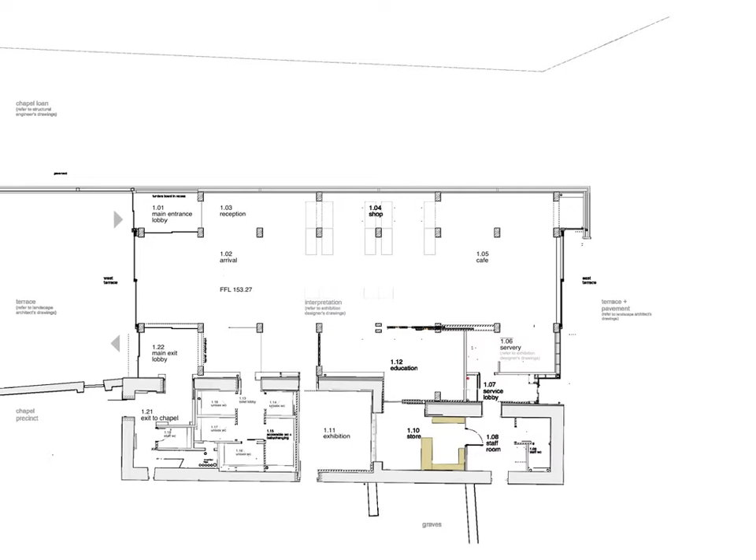So we've got all that stuff now. In order to get back to the same position as if you'd gone through the gate itself, it seemed to us that we had to expand this dimension into the place that you pass through. So that gate therefore became that truss system that receded into the distance, that became the route in, through, and through here. And architecturally, John's here, Simpson Brown, a lovely restoration of this little building here.

The way it's stepped down the hill, using that truss system of the gate, forms a series of stepping planes to reduce the sense of scale. So that becomes part of it, this thing hiding behind this object.

I've got to reiterate, this was not driven by us wanting to do architecture. We were put in a position to have to somehow perform in that position or walk away.

And that's the question you face in terms of that process, looking back through that idea that somehow it wasn't a building, it was simply a covered street. A lich gate that actually led you in off that street. It was a kind of non-attempted, non-building.

Jump to another project, Fettes. That incredible Bryce kind of elaboration of nature as it explodes from the ground.

And then jump to 50 years later, Kinnaman's amazing dining hall, which, when you study it, you realise is set within the trees of the garden. Whereas Bryce creates decoration throughout his building and in the admiration of detail, Kinnaman takes the idea of nature and creates these trees that rise up, and the canopy of the building drapes down as this series of branches around that setting. So you stand within nature.

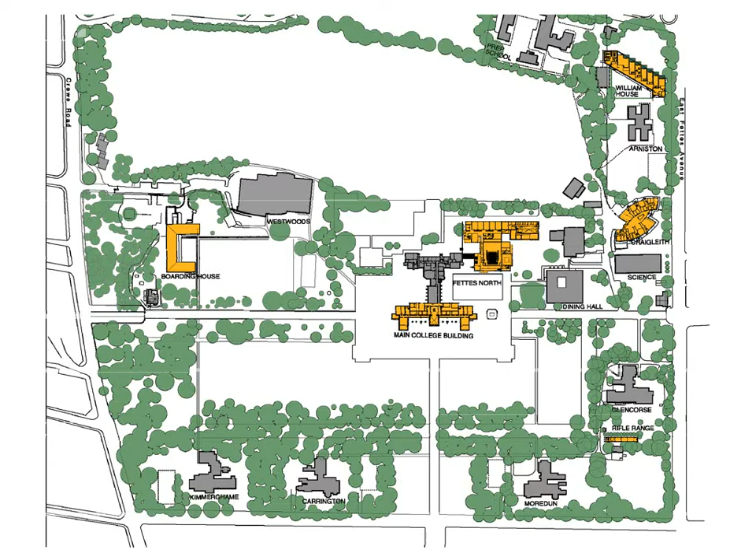So there was a kind of strategy of the new and the old, and we were talking about stone, girls and boys. But its framing and its angle is all about an orientation to the main tower itself.

So not only is it about the curve of the long-term master plan, but the relationship to that orientating tower. And this lovely bridge - the idea was the staff, if they needed an emergency to get up to the girls' side and boys' side, it was a shortcut.

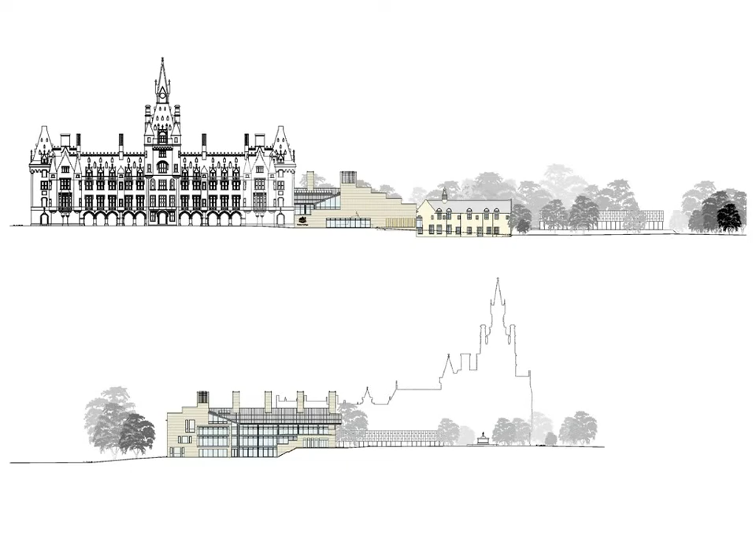And that's a great thing, architecture made out of need, which was what happened. So the building is about the original Fettes building and then the simplicity of that wonderful dining hall - again, both old now - and the insertion then of the new concert hall and academic building, which will be built over the next piece.

But the alignment, the orientation of the giant crow step that forms the step that ultimately sets the kind of line for the dining hall, and then the orientation of the central axis on the war memorial in terms of the ventilation shafts, are about those ideas.

And what that's made me think - those two projects made me reflect that somehow this relationship isn't right. That actually, architecture needs to come out and its use or user needs to come in relationship with heritage. So I was saying, in fact, it's use and heritage that drives things. It's use, it's people. Take the people away from Edinburgh and you have archaeology, you have Pompeii, but it's the use that drives, and the use that we work with.

The portrait gallery, a wonderful piece.

The number of people who stood in front of those steps - we spent two years talking about those steps, and the number of people who wanted to keep that demarcation from the pavement. It's okay that disabled could come in the ramp down the side here. That's okay. But is it okay?

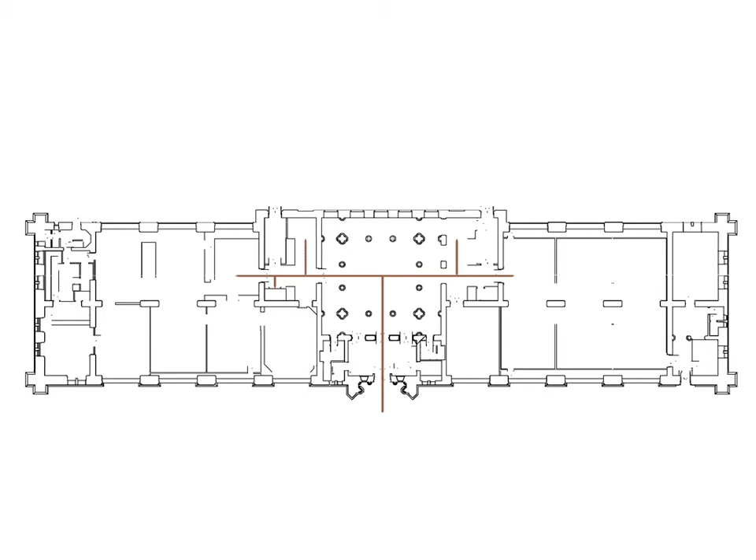So my colleague came up with this thing we did - this is the result of it. We actually, this is a secret, conceived this National Portrait Gallery with a big face, the mouth, and a wonderful tongue sticking out, for the folk who didn't want to step on it. Because that is about universal access, which is really important.

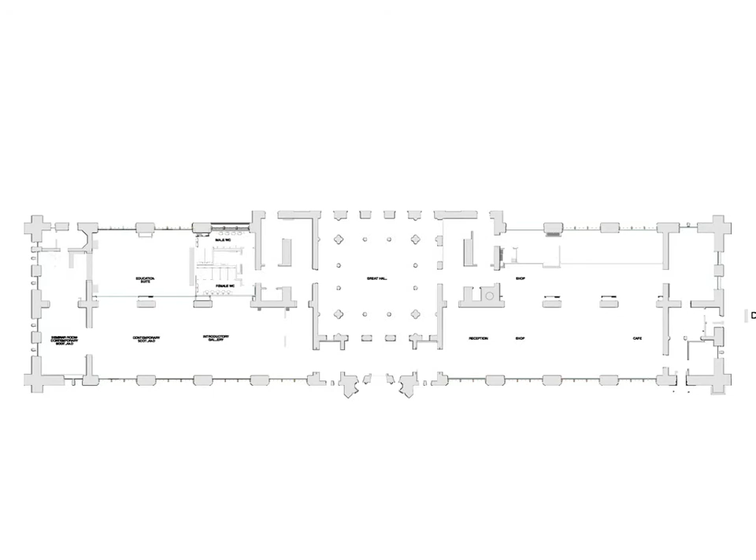But having established that - there was a little toilet here and a security office here. By simply opening up those two walls, suddenly the loggia of the building, this wonderful arcade, became like those wonderful Florentine, Renaissance foundling hospitals, and one that I kind of wondered about. Make it like Italy, take the glass out, and you have this lovely loggia along the side of the building. So it all becomes part of one piece.

And then the insertion into that - I saw this piece of folded spectacles, like the idea of an inserted ship into a bottle, that sort of hung within that space and defined that axis. The great thing of Ramboll's expressed structure and the lovely engineers - the way they were able to hang all this stuff off what was like a picture frame, to stand up there and become a portrait within this. So one lens, as the other side, is a lens into that.

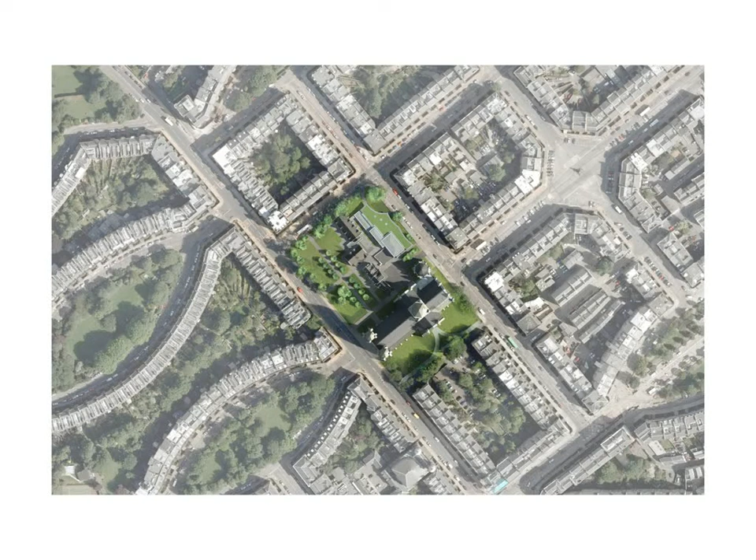So finally to St Mary's, which is probably the heritage side. In coming back to this use, in a way what we're constraining is use and heritage. That's the cautionary thing. But what's going to give it its kind of inspiration?

But what the cathedral said is, if we can take the Walpole Hall and make it a cafe, and if we can make the whole nature of the circulation part of a public edge, we could transform the otherwise internalized historic fabric to have an outward perception, an outward face. And so that's essentially what's happened.

And in the same way that the portrait gallery, the opening up of those arcades, allows you to see and make it more accessible, less threatening in terms of entry. You know how you walk through the new town of Edinburgh and look in the windows of flats? I don't know if people do that. You walk in and see the fantastic painting some people have, the terrible state other people keep things. There's a kind of wonderful nosiness we have about looking in.

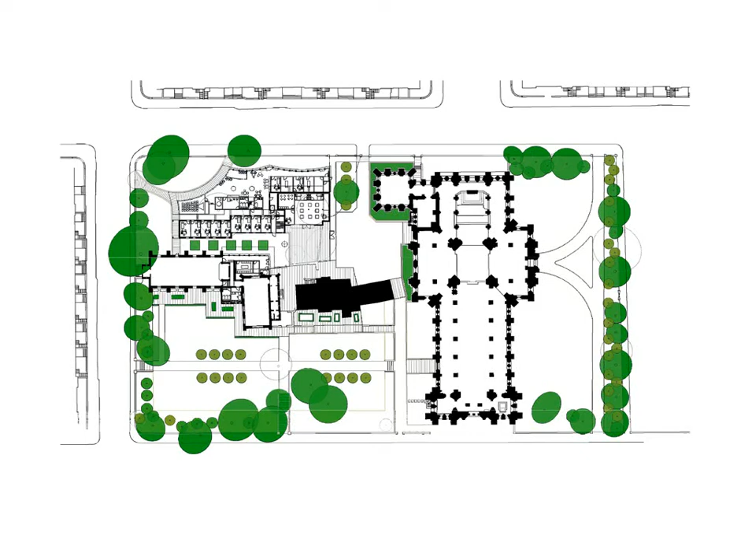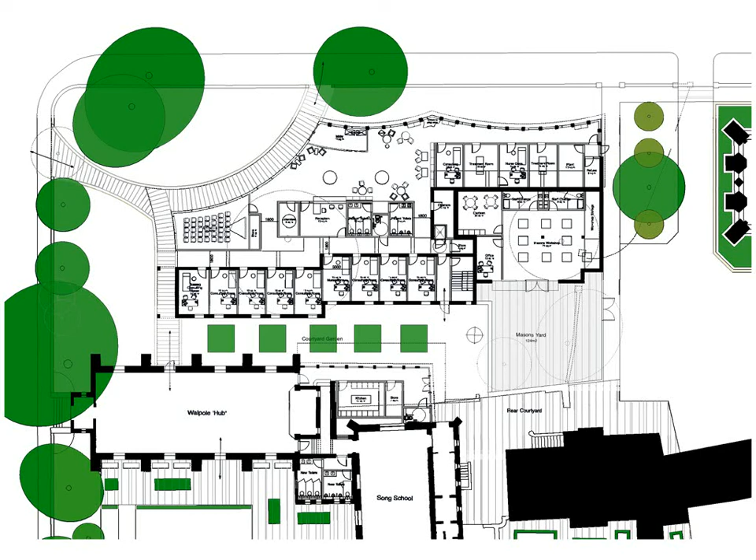It seemed to us that that circulation pattern of the medical centre - to turn it inside out, to take the circulation to the outside - and these lines are about protecting the tree root distances. So these lines form this landscape edge, and then the more solid bit forms this kind of village in the middle. So there's an internalized bit, and the stone yard now gets incorporated within that building, with acoustic treatment between the different spaces. So that becomes that.

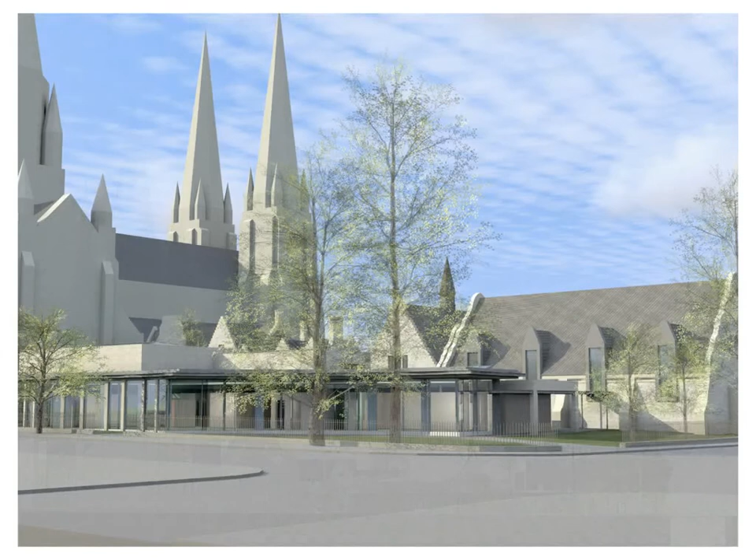So there were four. So where does architecture sit within our new thing? I think architecture sits outside it. It sits as something that transforms this into something even better. That's good anyway, but there are pressures within that seem that somehow need to be contained.

So I just thought, we'll just add the word 'ideas' - architecture and ideas, rather than architecture and new. Architecture ideas as being the kind of the power, and just to make it minus, so we'll make it an imaginary number. So the imaginary number transforms, which is complete nonsense - so just forget about all that. Anyway, that's our architect's contribution. Thank you.